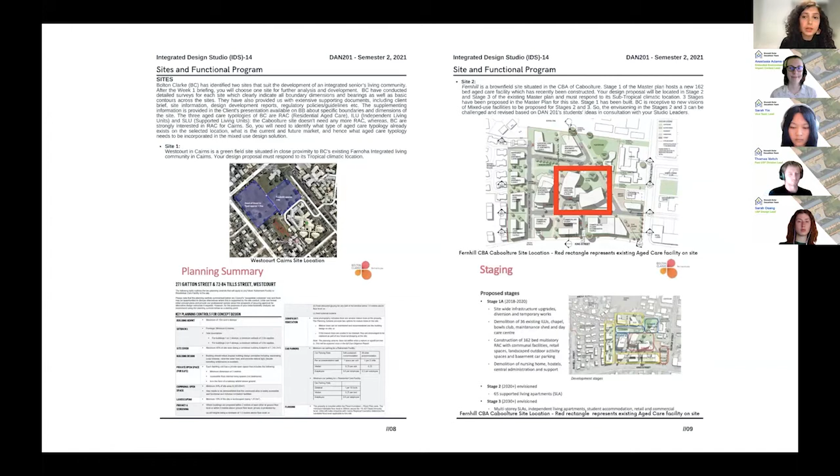The 13-week-long semester process that we are finally coming to a conclusion at, we are in week 13 now, was actually broken down into 3 types of workshops that deviated away from the signature studio model. We designed these to conduct with all the IDS participants in a sequential manner to facilitate design outcomes and data collection. The students had 2 interlinked assignments: the first half of the semester's collaboration focused on rapport building, learning and sharing interdisciplinary vocabulary of practices, design brief development, site analysis, exploring constraints, and developing master plans. The second half focused on detailed design development, testing of ideas, and evaluation of design approaches.

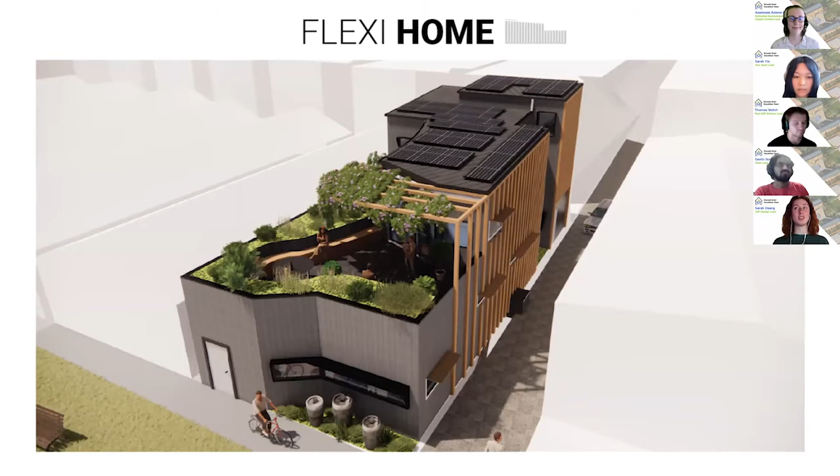A key feature of the Flexi Home is that it can function as 2 separate residences or as a single residence, depending on what the occupants need. This makes the home suitable for occupants at almost all stages of their life - if you have a young family that needs the entire space, or if you've got an elderly couple who maybe require less space but could benefit from the second residence having a carer living there instead. It also uses disability-friendly design and occupies a minimal plot size, responding to issues like urban sprawl and accessible living. And of course, we designed the Flexi Home to be as energy efficient as possible to lower its environmental impact as well.

So I'm just going to go over some of the basic layouts and design of the building. If we go to the next slide, you can see when it functions as 2 separate residences.

You have the primary residence on the bottom floor, shown in orange on your left, and this is the level which is wheelchair accessible. Then you have the secondary residence on the 1st and 2nd floors, shown in blue.

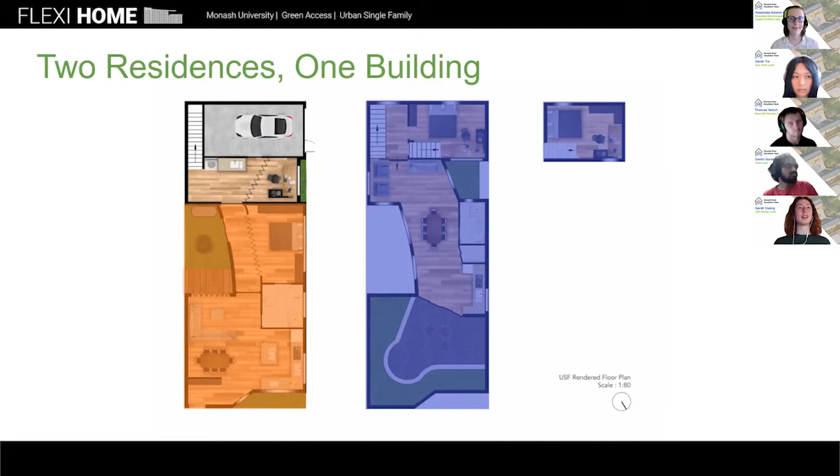When it's functioning as two separate residences, it was designed so both have their own entrances, their own green spaces, outdoor spaces, and their own utilities.

They did share a common laundry area, and this also functions as interior access between the two residences, which allows the whole building to function as one residence if a single family is living in it.

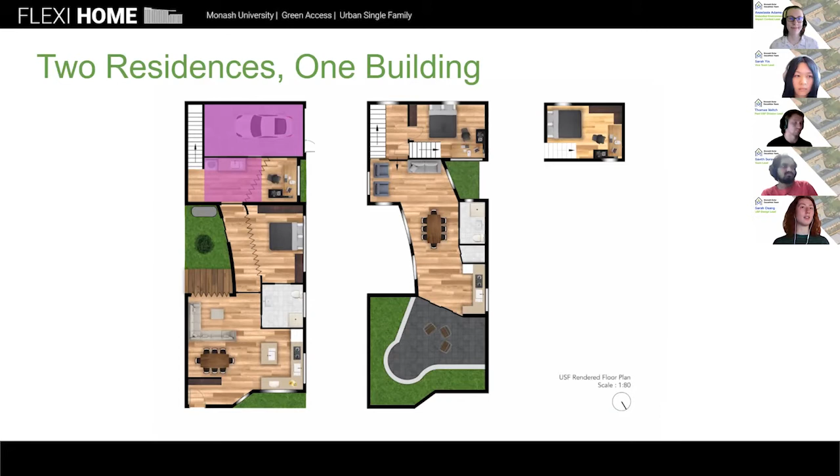When designing it, we wanted to create a really high quality living space, tried to make it feel light, open, and give it a strong connection to nature. This incorporated high ceilings, open plan living, and lots of windows throughout to ensure natural light and ventilation, plus plenty of green spaces and indoor-outdoor living areas.

So now I'll pass to Tom, who's going to go over some of the more technical details about design. Thank you, Sarah.

I'll go over the HVAC system first. Basically what we did is separate the ventilation and the heating and cooling systems into two separate ducting systems.

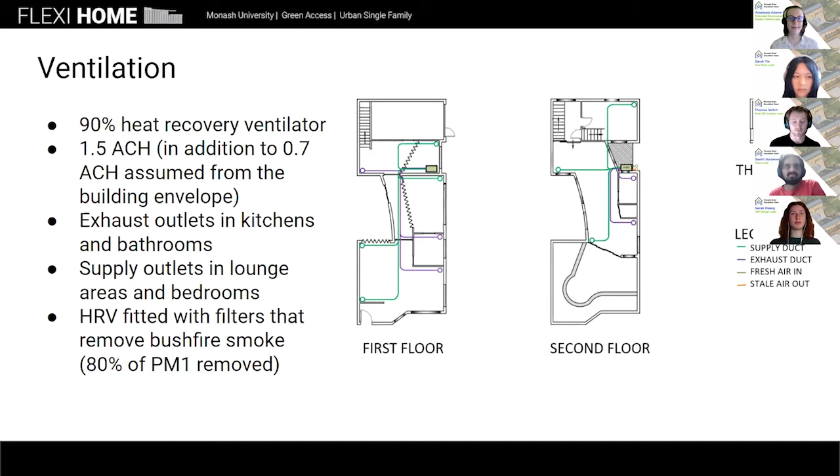We also have exhaust outlets in the kitchen and bathrooms, supplying air into the main areas such as the lounge room and bedrooms. The HRV is also fitted with a filter that removes up to 80% of smoke particles, which is necessary for Melbourne.

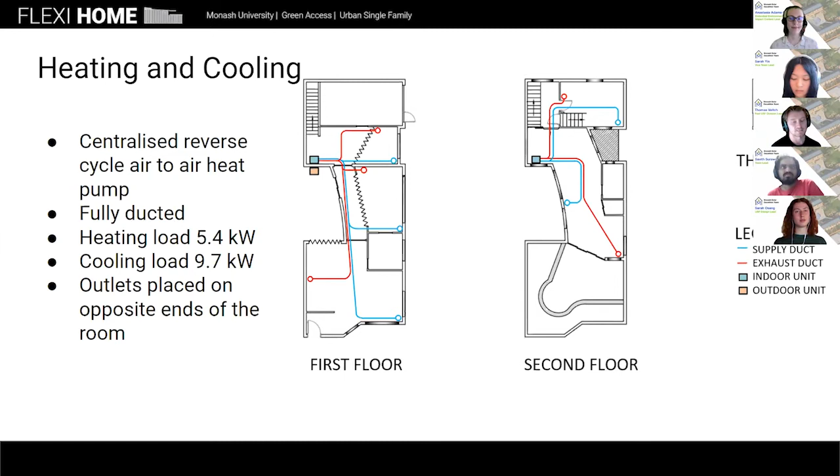For the heating and cooling, we designed it to be a 10 kilowatt system, which can handle the maximum cooling load of 9.7 kilowatts, and it's a centralized reverse cycle air-to-air heat pump. We also have outlets placed on opposite sides of the rooms to encourage airflow.

As I said, this project has to be net zero. So to do that, we also have double glazed windows and seasonal shading. For our solar panel system, we have 29 solar panels with a hybrid battery.

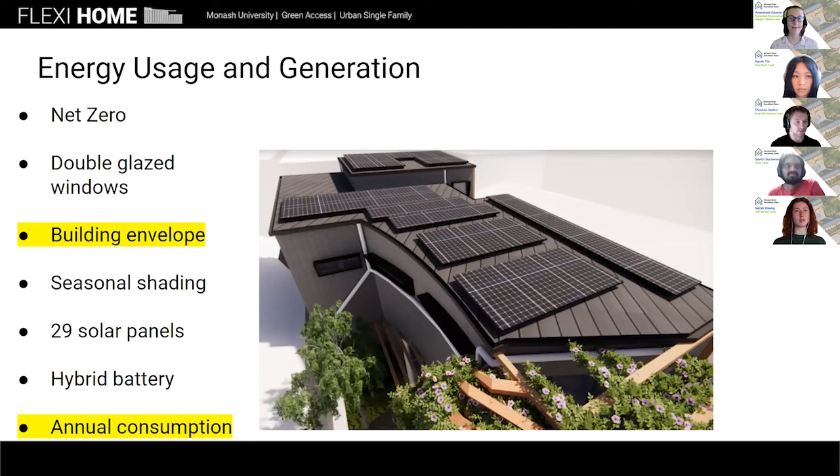One of the main features we had was a rooftop garden, so we made sure to include native plants, as these are far more drought resistant.

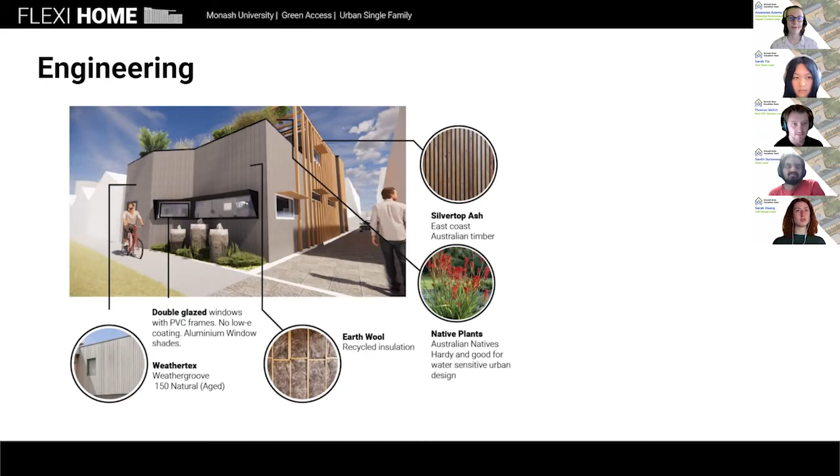We also wanted to make sure we had a high quality level of insulation, so we have earth wool batting as well as extruded insulation, just to get a higher R value. Lastly, the total cost was $425,000, which was $45,000 above a code compliant home.

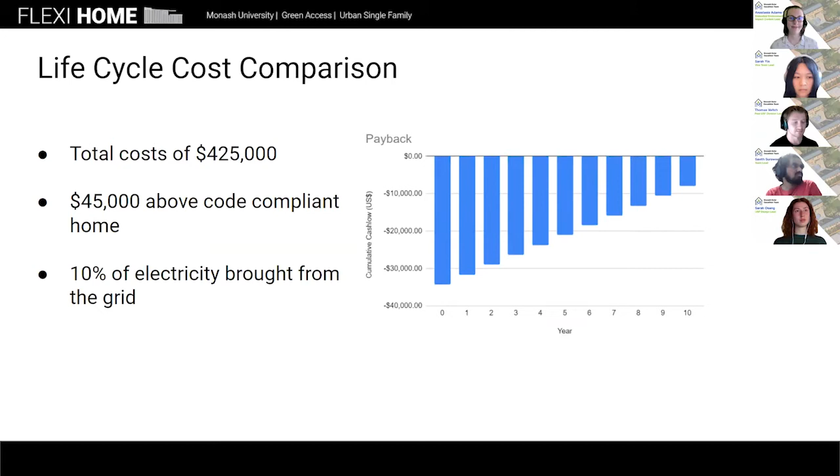Sarah and I will be around for the Q&A if you have any more questions. I'll pass it on to Sav, who will do the attached housing.

Thanks, John. So I'll be taking the attached housing division's design. We designed a domestic violence refuge for victims of domestic violence.

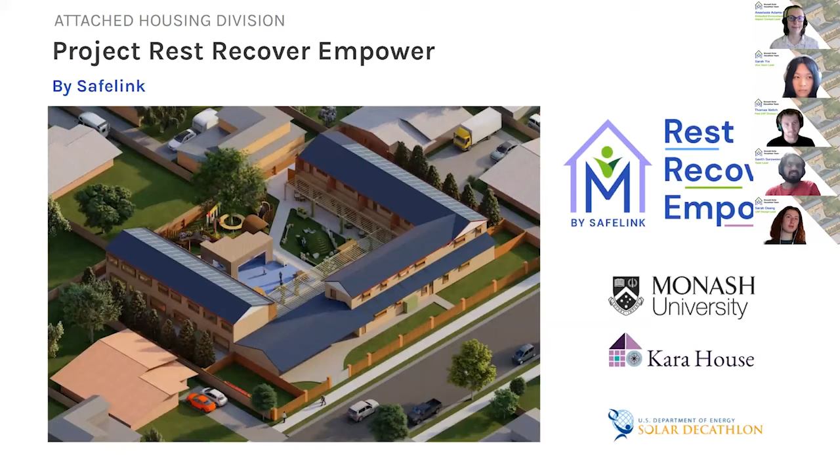We actually partner with Kara House, an organization that deals directly with women coming out of these situations, and they handle everything for them. We wanted to cater to all their needs and the things they've found missing in their previous refuges. So this is basically for transition housing.

We've got a series of goals that we used to guide it. We wanted to make sure it had purpose-built spaces. The spaces were also flexible, which is one of the requirements we got from Kara House. Security and privacy were obviously really important, along with a design that was easy to operate with low maintenance costs and had appeal to stakeholders.

To speak to the purpose-built space, we had a really simple layout. As you can see, there's block A, block 1 at the top and block 2 at the bottom, which include the standard units.

In blocks 4 and 5, we've got additional multi-purpose spaces and staff areas for the Kara House staff to monitor the situation with the women. And in the center, sensory gardens and kids areas so it's not a boring space for them, they get to enjoy it. So it's really practical, and we tried to make it colorful and a little bit different.

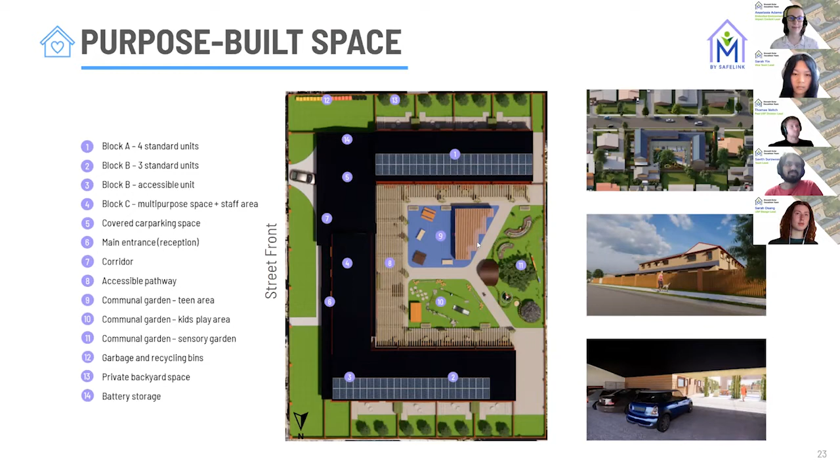That layout takes in the security and privacy aspect, with a U-shaped layout facing everything away from the road so you can't really look inside. That was really important to them when we designed it. We also have additional cameras, giving us layers of active and passive security.

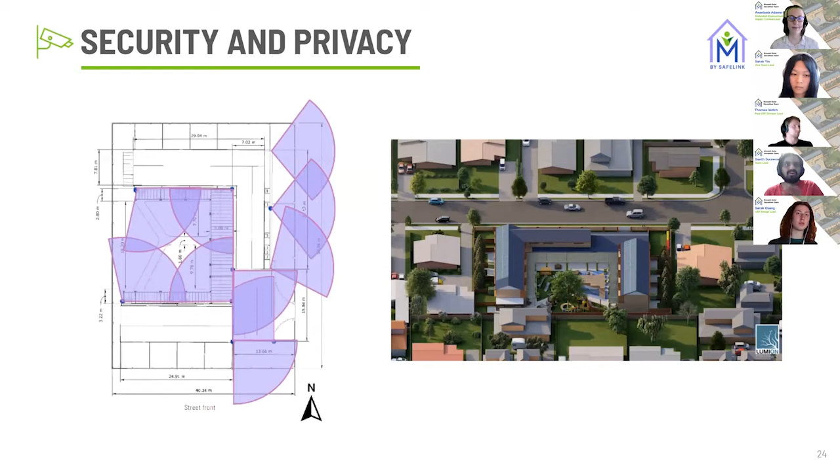We have really good thermal envelopes, high efficiency windows, and all that to make sure we're reducing the energy usage to heat up our spaces. We also took real consideration into the material choices we made for everything in these envelopes.

We also made it important in our design to have really good acoustic insulation, because for this kind of house the occupants are sensitive to the others involved, there's usually loud noises and stuff. So even though we had adjacent units, they're pretty good at isolating noise.

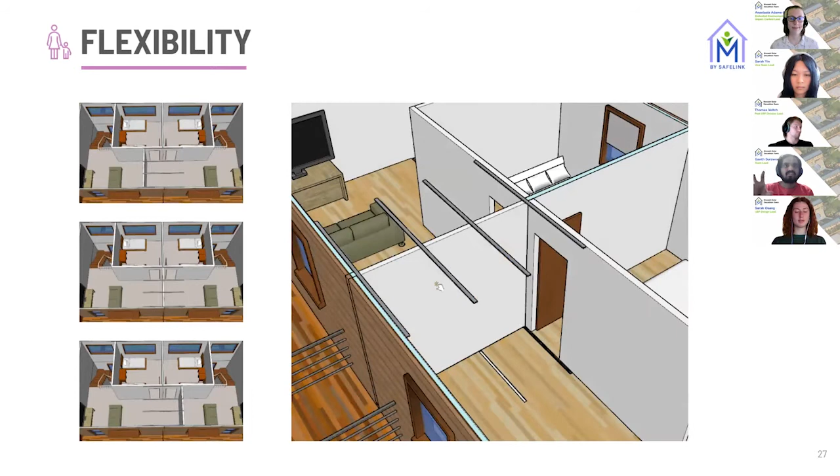One of our highlight features was that flexible layout. On the top floor, we have a movable wall, and it allows the design to have a different number of bedrooms when required.

You get a better view of how the adjacent units can change and adapt, having an extra number of bedrooms to accommodate a larger family if needed, while a single woman can take up the other one, or they can be put into the standard size. We got feedback from Kara House that they'd often not be able to use some spaces because women taking up the whole space meant they didn't have enough beds for bigger families, so this was really a highlight feature for them.

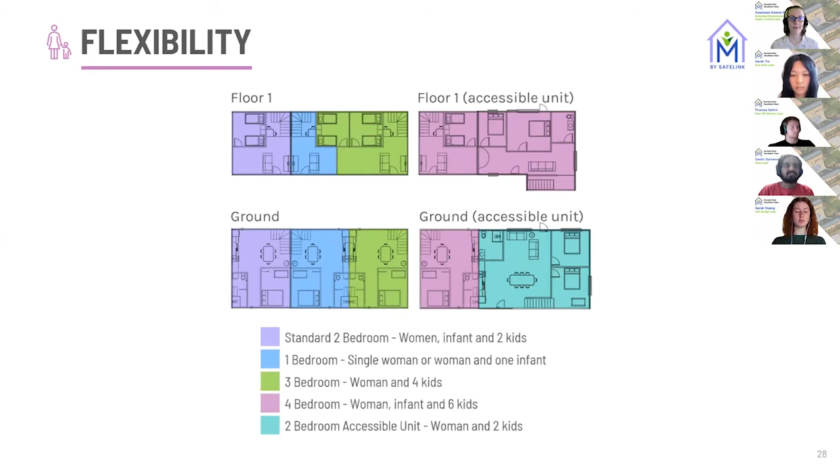Our ventilation system was basically made up of a fan coil unit that did the bulk of the heating and cooling, and a heat recovery ventilator to handle improving efficiencies, reducing wastage, and changing air.

Because of the work we did with the ventilation systems and a really good envelope, we got really low energy usage compared to a standard refuge we'd have to build. The energy savings are massive, and compared to a standard home it's amazing energy performance, meaning we made something practical and energy efficient for Kara House.

So that's all, I'll pass it on to Sarah and Anastasia for the school.

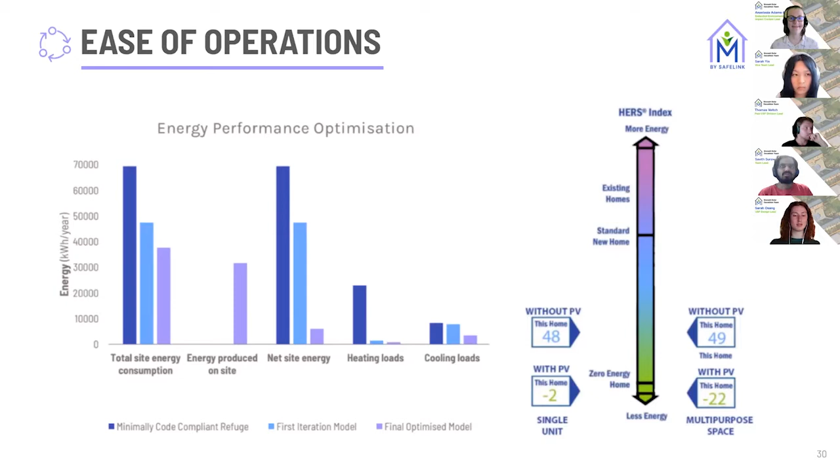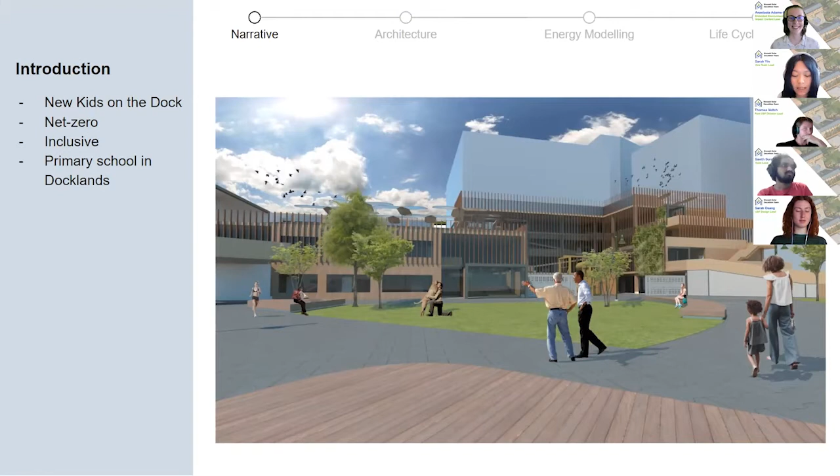Our team, the New Kids on the Dock, designed a net zero inclusive primary school based in Docklands. We chose Docklands because it's part of the Urban Renewal project, funded by the government in an effort to revitalise the community. Moreover, there's an urgent need to build more primary schools in the city area.

Our school has been designed with four design goals in mind: minimizing the environmental footprint of our building by proposing an energy efficient design and maximizing the circularity of the building overall. We also wanted to accommodate students with special needs, including vision, hearing, or mobility impairment, by incorporating various inclusive design elements throughout our school. We also implemented features that aim to nurture sustainable habits in our students that they hopefully take with them into the future. Lastly, we wanted to engage with the wider community by integrating the school into the local context and transforming it into public spaces outside of school hours.

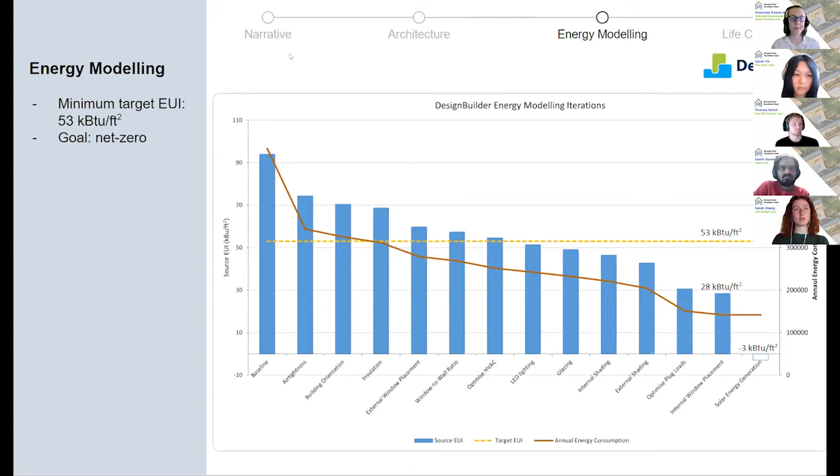Thank you, Sarah. A key goal of our project was to reach net zero energy, where our building produced as much energy as it consumed. We first aimed at achieving this by reducing our energy usage as much as possible through passive energy strategies, such as thermal chimneys.

The thermal chimneys draw on the vertical nature of our school to increase natural ventilation throughout the building. They use a combination of air movement from the wind and thermal siphoning to encourage stacked ventilation to move from low to high elevations and eject the warm air through the sawtooth roof vent system. We also placed vents on the ground floor of our south-facing walls to take advantage of the prominent southerly wind during the warmer months.

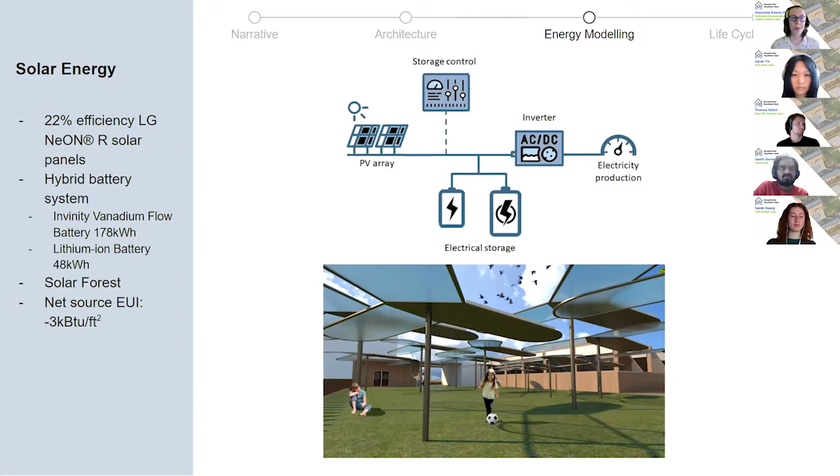We then offset the remaining energy usage with a photovoltaic system on the roof and a hybrid battery system. Reaching net zero energy helped us reduce our carbon emissions during the operational stage of the building. However, we wanted to reduce our environmental impact at all life cycle stages.

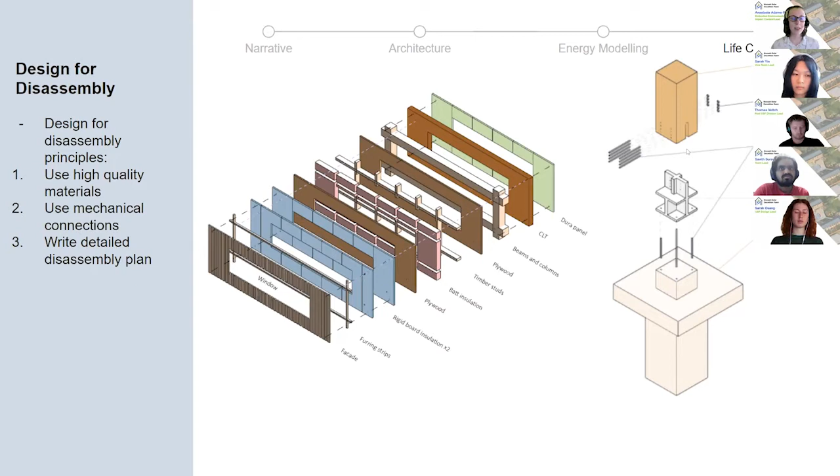One example is at the end of life stage of our building, we incorporated design for disassembly principles. We used high quality materials to ensure everything was lasting as long as possible. We used mechanical connections like bolts and screws, and then we wrote a detailed disassembly plan, as you can see in these diagrams.

Overall, this meant that at the end of our building's useful life, we could disassemble it rather than demolish it to ensure all of the building materials could then be used on future projects. Overall, this helped us achieve a building circularity score of 87%, which considered both our input materials and then how we use these materials at the end of the building's life.

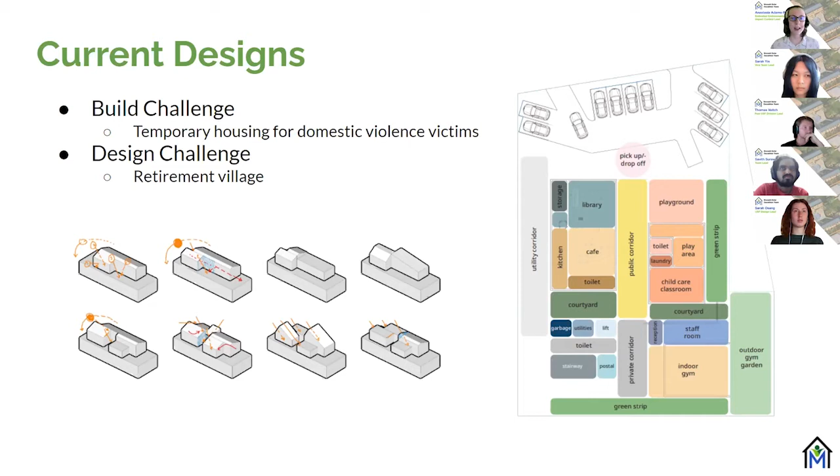Overall, you've seen all three of the divisions we competed in last year. Going forward into the competition, we're going to compete in the Build Challenge and the Design Challenge, where we're building a transitional house for domestic violence victims and designing a retirement village.

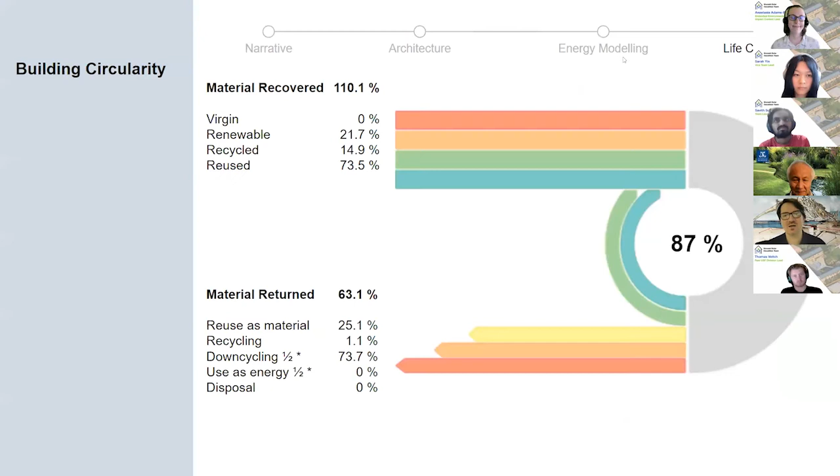Maybe one question, I can't remember which presentation it was. I think it was the second or third presentation about the mechanical systems. I'm curious how you got introduced to how they work, how from a technical perspective, how to incorporate that as a designer into your work. As an architect, I know these systems can be quite daunting for us because we don't know much about what it is that they do and how they influence our designs. So maybe putting the question to the team, at what point were you dealing with those systems, how were you including the thoughts about ventilation and sizing, for instance, and positioning of the equipment? I remember with our studios, there was a lot of conversation about where do you put your equipment, how do you service your equipment, and so forth. So what role did that play as part of your design?

Yeah, I could speak to that. So we spent a lot of time, as a team, doing calculations and things like that. But we also spoke to actual companies, engineering firms, to get advice on all of our systems, like the fan coil unit and the heat recovery ventilator.

We made sure that it would be able to serve both those spaces at the same time. And we got the values and stuff from our actual suppliers, so it was definitely a joint effort.

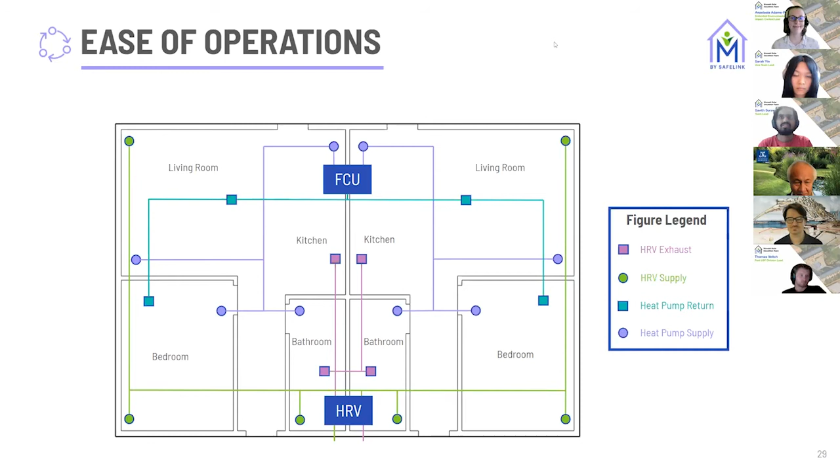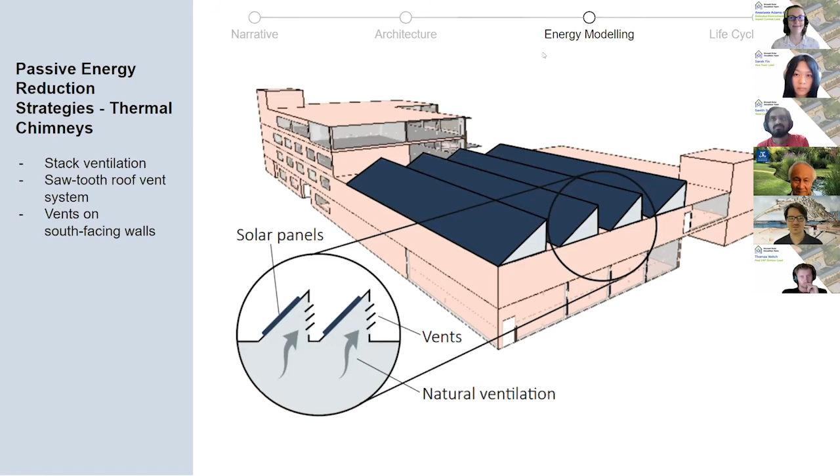Lou, I wouldn't mind sneaking in a quick question. I don't have access to Q&A as a host, but really impressive work, I agree with Dominic. I was really impressed at the breadth of different disciplines you had involved, even business people from memory. Just wondering what the format was in trying to bring everybody together - did you bring everyone together at once, or was it little parts of the team? And how enthusiastic were some of the less built environment disciplines like business in getting involved in the design?

We come at it like we recruit - looking for people that are sustainability focused at first, so it really is a group effort. It's not bringing in people randomly, everyone's really passionate about this team. It's the only way these kind of things happen, and for us, in the best way possible, we collaborate the best that way.

Did you get together in one large group? Yeah, over Zoom for most of the year, and then once we got to open up, we did come in person and do big sessions over multiple days, especially leading up to the competition - massive study sessions, and just cranking out our submissions.

Well, we got a question from the audience asking about how you optimize your building fabric and making sure there's no thermal bridging and things like that. I think one of you could answer for one design because of the time limitation - we could do this at the end too. Tom, do you want to take that?

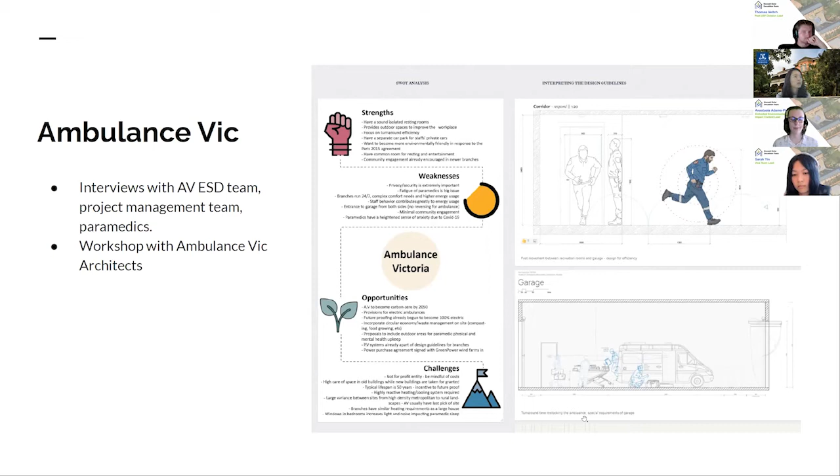This was quite an interesting moment for both architecture and engineering students, so they could look at built examples at the forefront of sustainable design and how they achieved those outcomes through built projects.

Moving on to ideation - at the beginning it was really important for us to get students to develop an understanding of net zero carbon design, as well as ESD first principles.

A lot of the students within the studio were a mix of first year and second year Master of Architecture students, and Master of Engineering students. So the varying degrees of skills and knowledge had to be bridged at the beginning of the studio.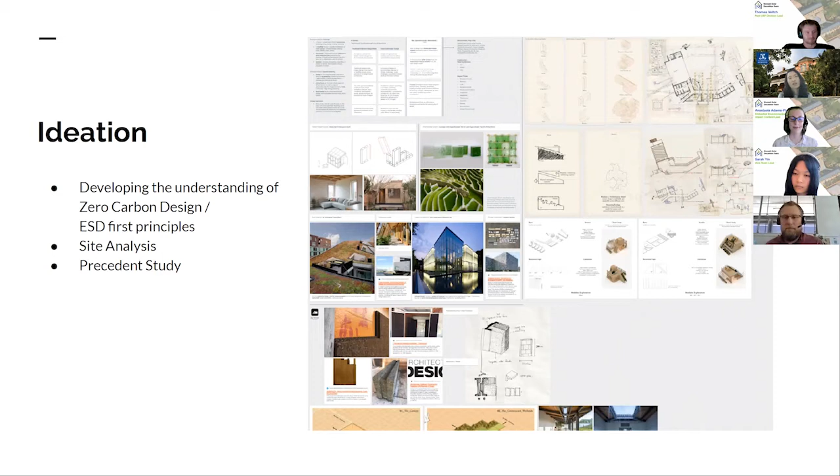Something I'd like to note here is that these works were all done in groups to ensure interaction within the student body, making sure an engineering student was always integrated within those groups - each group was allocated one engineering student, so that engineering students weren't isolated in a separate group.

Moving on to idea sharing - we explored both small group idea sharing and bigger group presentation-style idea sharing. We all know the usual studio pinup setup, but in the digital studio format it was important for students to have an environment to share ideas in a small group setting, communicating in a rather casual and informal manner.

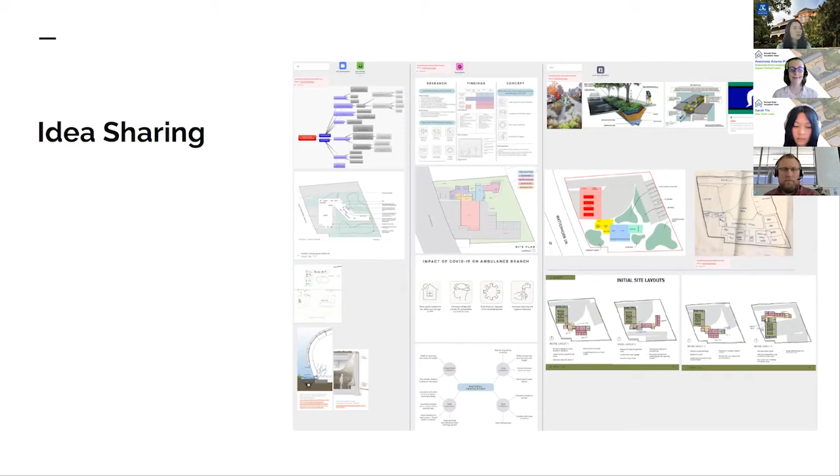Whereas we found that in a larger group presentation setting, the students can get quite rigid and formal in terms of presenting their ideas, so it needed to sort of tag in between to balance out those.

If we briefly go into the design development process, one thing we incorporated was revisiting some of the interview content from the beginning of the studio with the paramedics and the construction and development team from Ambulance Victoria, to understand the human scale needs and requirements of each activity, and the key spaces that needed to be understood in a very detailed manner.

So these are some of the series of drawings that the students collated as part of the design development exercise. And this is just a quick snapshot of how we usually worked around the weekly pin-up exercise, to ensure everyone had something to talk about every studio, and that you could see everyone else's work in a quite open platform.

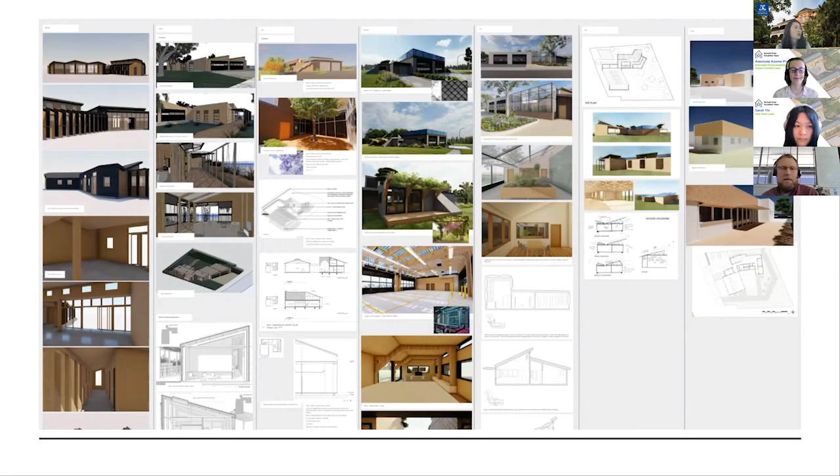So I'll be going through 3 key works from the studio, ranging from second year first semester, and then first year first semester as well, so you'll be able to see quite a range of skills and design resolution.

To start with, I'll start with Vincent's work. The site plan shows quite a few key parameters around the spatial requirements of Ambulance Victoria - the garage space, living and dining spaces, resting areas, and large garden spaces were all part of the key requirements that needed to be developed according to each student's design objectives. Vincent looked at a number of different ways in which Ambulance Victoria could take on future initiatives.

These range from some of the more experimental design initiatives all the way down to quite a small scale achievable design initiative. We can look at some of the more experimental things like the PV garage and integrated charging stations for the vehicles, and the integrated landscape and wetlands system into their garden spaces, and community spaces that really start to bring the community into the Ambulance Victoria site, opening up this branch as a community hub.

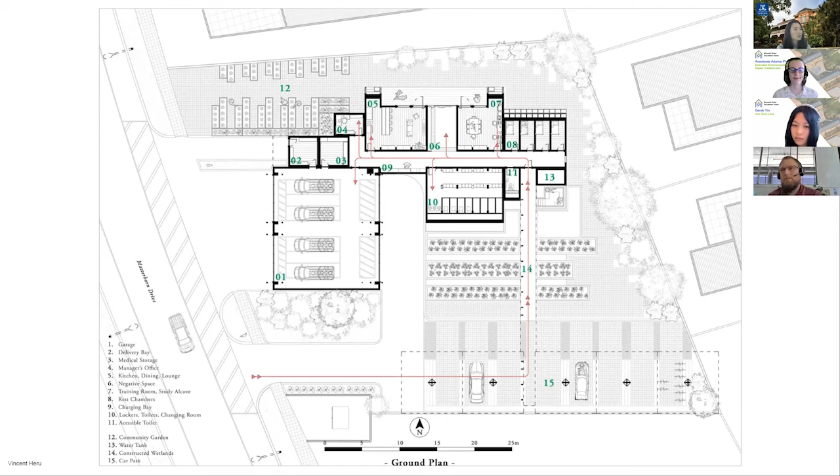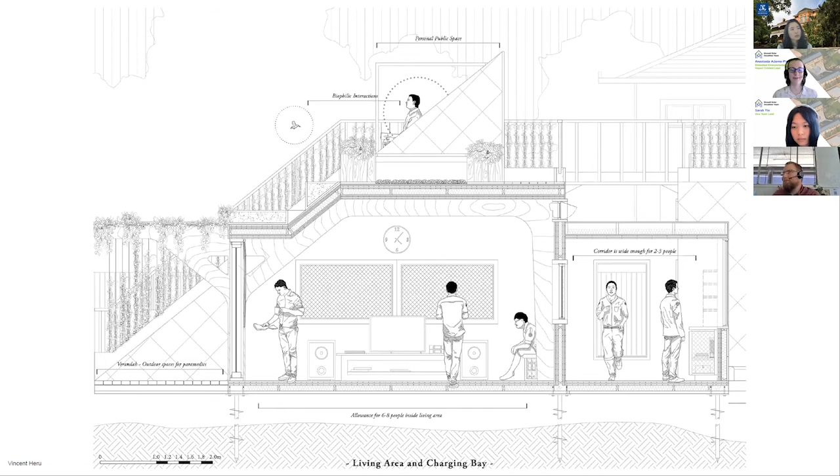And some of the other smaller scale designs you can see in the following drawings - this one really looks at the constructed wetlands within the back garden spaces. If we go into the sections, you can see how they've developed from the previous ergonomic studies, and then they start fitting their spaces into the various key areas that have developed from both ergonomic studies and the design requirements for Ambulance Victoria.

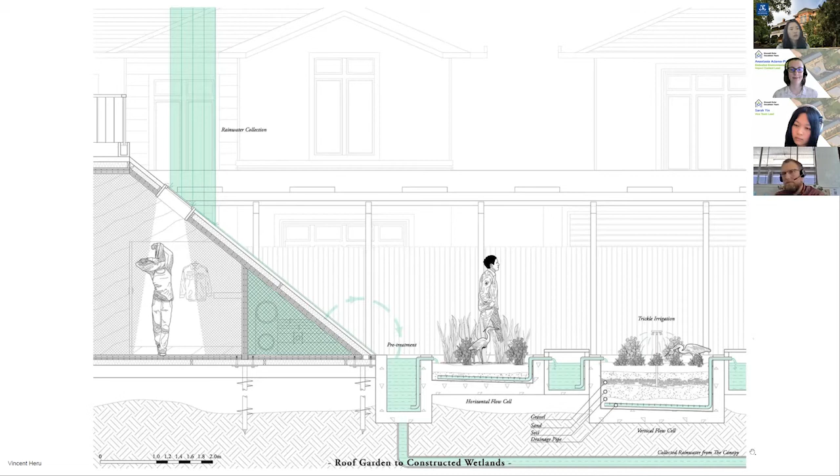With these representations or renders, the studio really focused on communicating those ideas quite clearly to both the stakeholders, noting that some of these imageries in real life practice can be used in public communications. So we focused a lot on finessing these images to make sure they were truly reflective of the users and who it would be communicated to.

I'll flick through some of these images quite briefly. This is something David will touch on a little later, but each student did go into a little more technical detail in terms of how the design would achieve passive house design principles and calculations of carbon emissions.

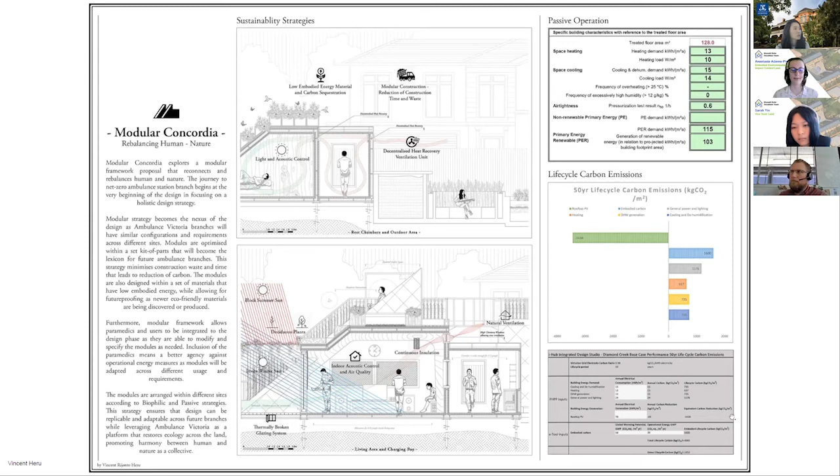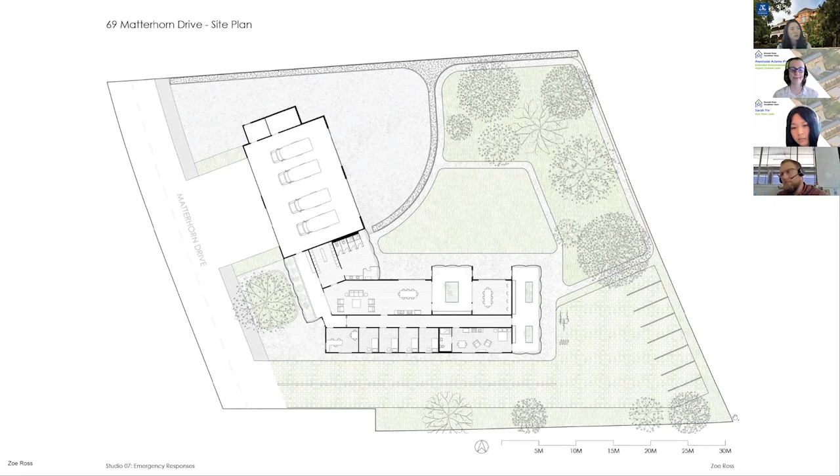The second student is Zoe, and one thing I'll probably talk about in Zoe's work is mainly the material research. Zoe was a relatively inexperienced student in terms of environmentally sustainable design principles, but one thing she really wanted to explore was new materiality that could be integrated as part of the design solutions. The material she looked at was ETFE, and how that could be adapted into various different functions of the Ambulance Victoria branch.

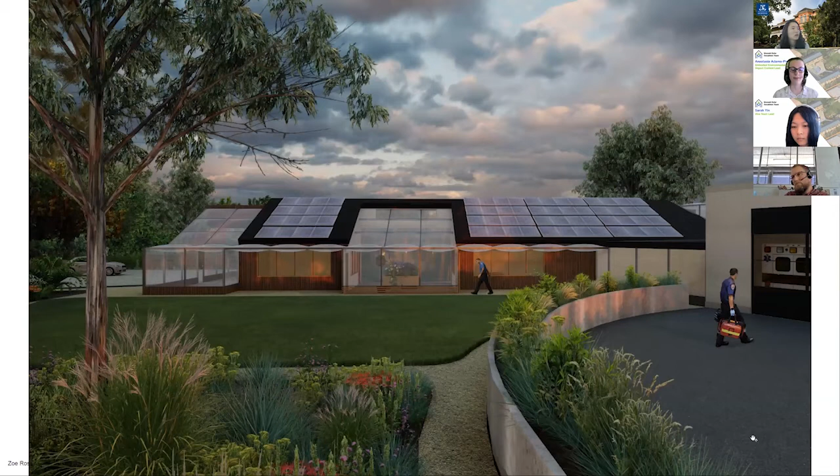These are some of the images showing where she had integrated ETFE and various other ESD initiatives that she proposed for this branch. A lot of these sections are really just touching on, again, those first principles in terms of ventilation and orientation for the branch design.

Looking at some of the detailed sections in terms of students understanding how those technologies actually integrate into the building, but also be able to communicate this back to the stakeholders. So we explored a lot of different methodology and different ways in which the drawings could communicate both the technology in a simple manner, but be able to be quite didactic, so the stakeholders or non-designers could really understand what we were proposing.

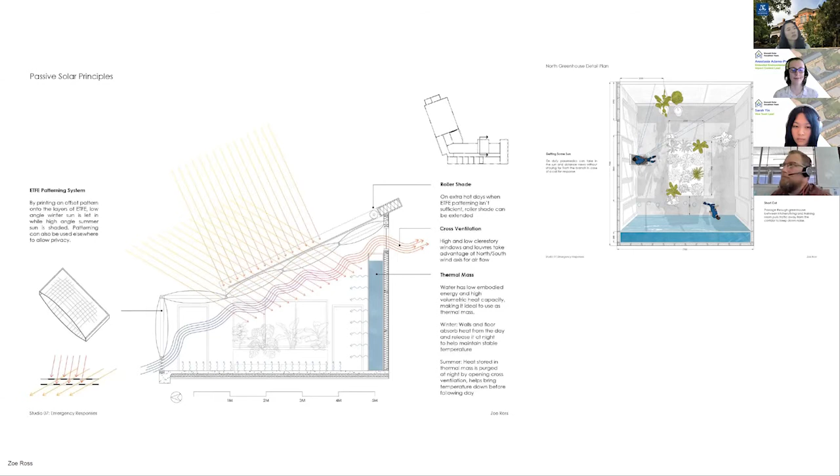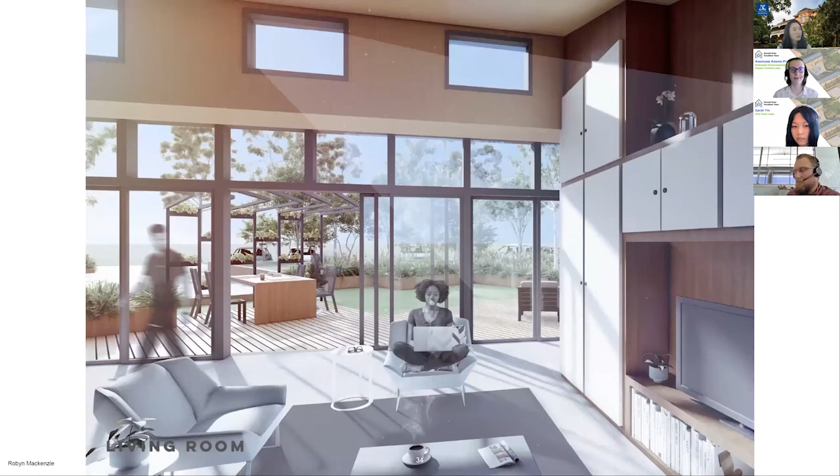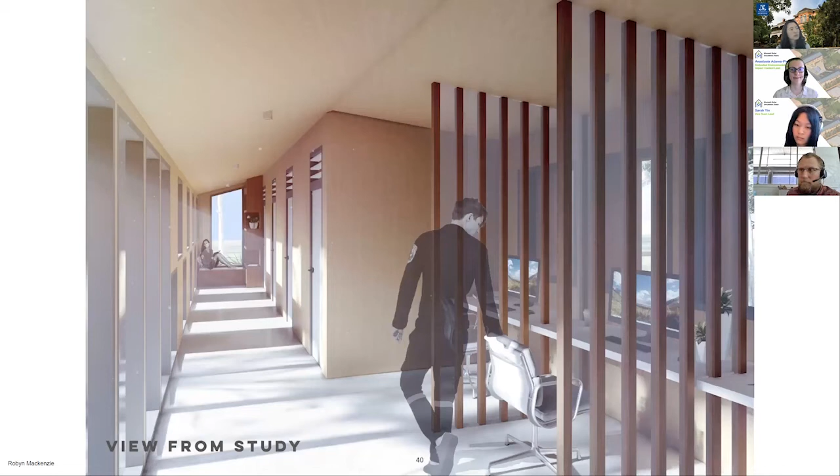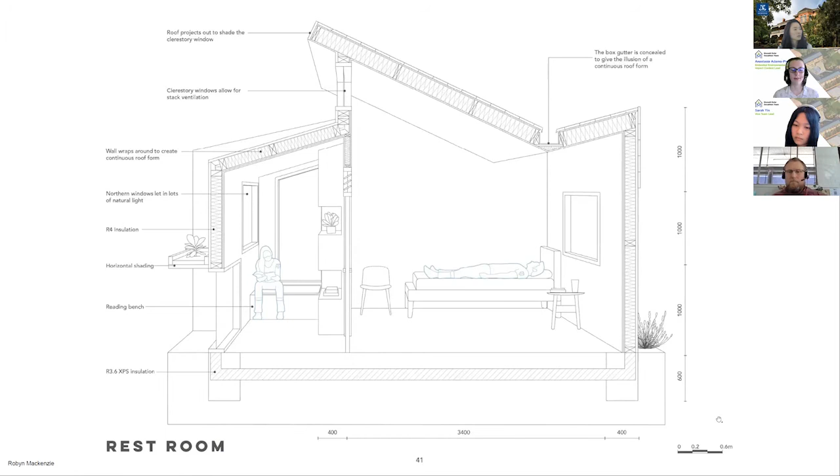The last student's work is Robyn's, and again this one I wanted to touch on was the integration of the landscape work and some of the programmatic suggestions Robyn had done for this proposal. So apart from the usual gamut of spaces like living spaces and dining area, she also looked at various study spaces and rest space for the paramedics that could be integrated within the branch spaces, and also some of the other really small design details that could be integrated as part of further development for the branch design. So here's some of the views she was looking at as part of the landscape integration.

So all of these were fairly well received from Ambulance Victoria, in terms of where the typical ambulance branch doesn't really look at a landscape solution as something they need to improve upon. But a lot of the proposals that students looked at focused on those small opportunities that could be improved with Ambulance Victoria.

To summarise some of the observations I had: really creating an environment for open discussion so the students felt safe and unjudged for any of the comments they could make, and then providing opportunities for a variety of interaction, as mentioned, in a small group setting, a bigger group setting, and a really open forum with the stakeholders and consultants.

And then including engineers from the onset of projects. I think this was echoed many times with other speakers as well.

And this next one is something I really want to point in on for everyone: providing support and toolkits for the engineers and non-designers to participate in ideation and design development. I think we often forget that non-designers, or anyone who doesn't necessarily have experience in this design development or ideation process, we need to provide those processes and toolkits for them to be part of the discussion. And this was something IDS really looked at in detail.

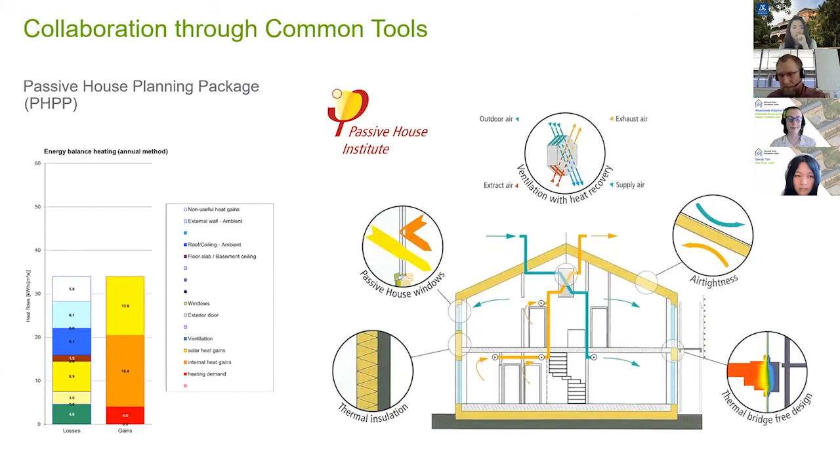We also, alongside that, put forward the use of eTool, which is a life cycle analysis software. Again, it's a relatively easy tool for students to use. It's hard to use it when you don't have a lot of detail on your project, but nevertheless, it's not too complex. It's kind of like a glorified spreadsheet, really, for putting data in about the volumes of your materials and the environmental impacts data for those materials.

So we were able to follow that through such that students could get a picture of the whole life cycle of the building, both in terms of its embodied carbon and its operational carbon, and to try and offset that with the potential for renewable energy generation on site. So looking at this kind of energy balance, or effectively a sort of net zero potential for their project.

And so that was one of the key questions: can you do it? And so we asked them to work through this process together and come up with the answer.

When we did the vetting, which is part of the IDS process, so after the students' works have been completed and handed in, we look at how did they perform, and all of the students were able to complete the PHPP modeling process. Some of the students carried out the eTool modeling process, and most of the students were able to demonstrate convincingly that there was a net zero carbon potential for their project.

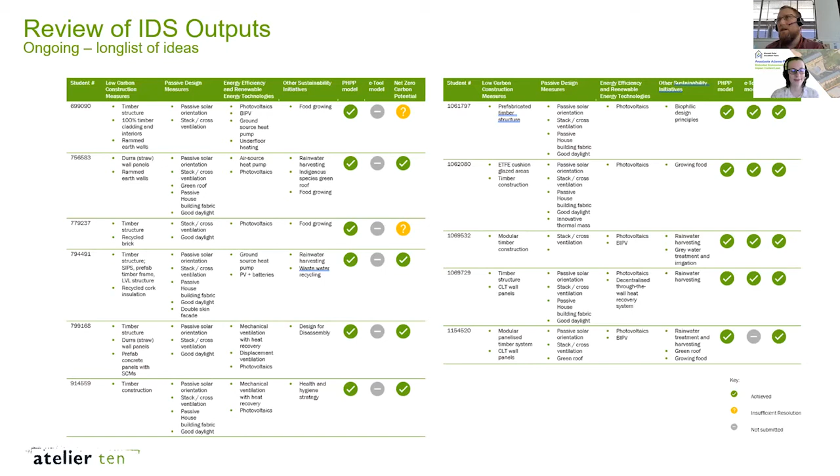In addition, they identified a number of low carbon construction measures, passive design measures, energy efficiency and renewable energy technology measures, and then some other more interesting sustainability initiatives for their project.

We asked them to specifically produce a set of information at the end of the exercise, which was to explain their scheme either with an isometric or a section. It's very important that the students are focused on how their sustainability initiatives integrate into the architectural form.

We also asked them to report on their passive operation potential through PHPP modeling, and also to report the overall sort of net zero carbon potential for a 50-year life cycle, and to give a narrative alongside that.

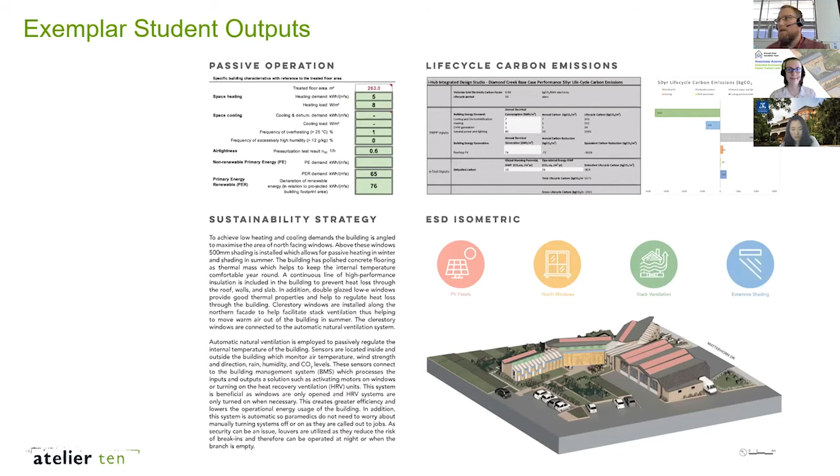So every student produced one of these A3s as part of their submission. And as you can see, some great graphics and ways of explaining the concepts for their projects.

Our role extended beyond the studio, so we actually vetted the work afterwards. We went through all the projects, really looking at where they'd focused their attention in terms of delivering potential for net zero carbon. This was a report that went out to the team, goes out to the client, Ambulance Victoria. So really, looking at where they'd focused, it was really on this net zero carbon pathway, but solutions which also brought health, well-being, and operational savings to their projects.

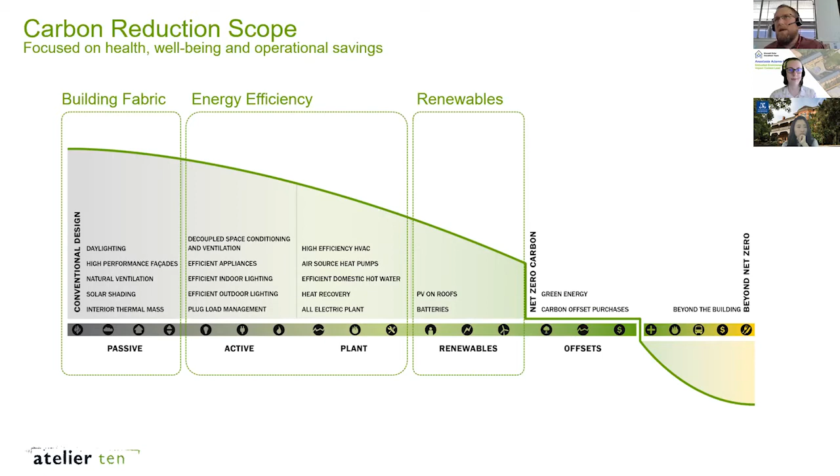Some of the passive measures, it was interesting, because generally the typical building for Ambulance Victoria is not too bad in terms of passive design potential. It's, like I said, rather like a large domestic property with good natural ventilation, generally high thermal mass, generally good form factor.

But what they brought to that was looking in detail at some of the wall build-ups, particularly the difference between walls that contain steel studs or timber studs, and how dramatically different they perform because of the thermal bridging effects. Looking at using the PHPP to help with their passive design potential, so form, orientation, shading, and also looking at the importance of airtightness, so looking at different airtightness targets and how that translates into the way they think about their detailing.

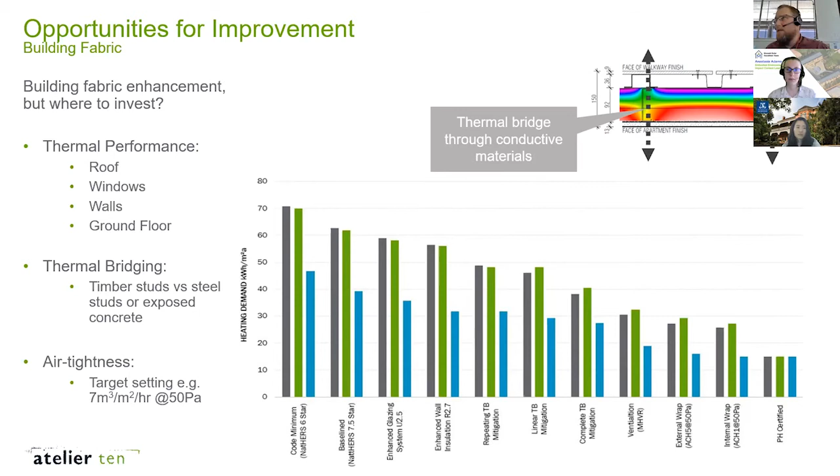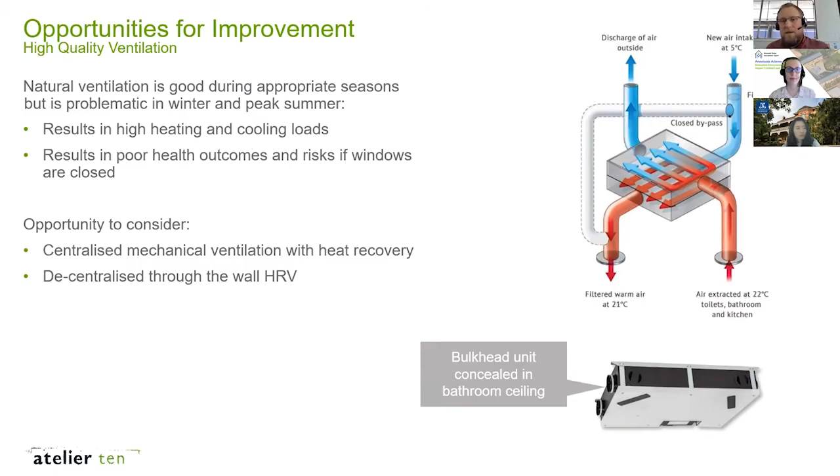Natural ventilation is obviously really important for the bulk of the year, but it was interesting thinking about what happens in winter. Most students incorporated heat recovery ventilation, as we saw in the earlier schemes from the Monash students, looking at options for centralized mechanical ventilation with heat recovery units, or decentralized through-the-wall HRV units. In terms of active systems, there was a tendency to decouple the fresh air supply from the HVAC systems for heating and cooling, focusing on delivering an all-year-round resilient, potentially filtered source of fresh air.

A lot of ambulance stations are located in acoustically challenging situations, close to big roads. So it's important to think about how you can get good fresh air through a mechanical system like this, while still allowing the opportunity for natural ventilation.

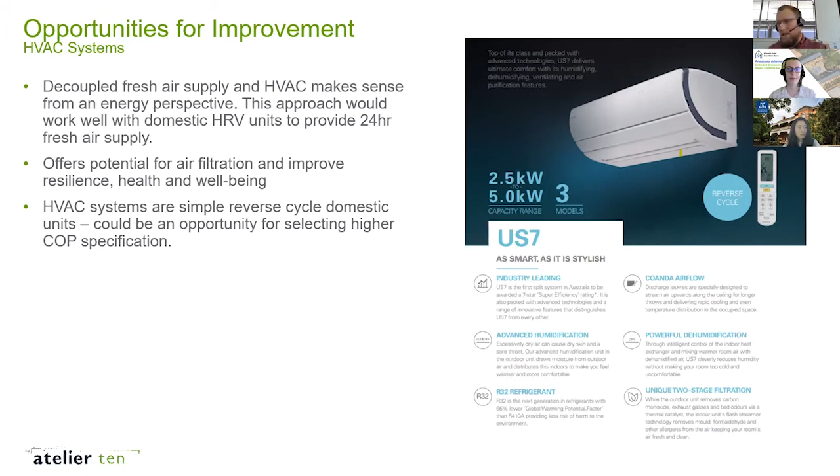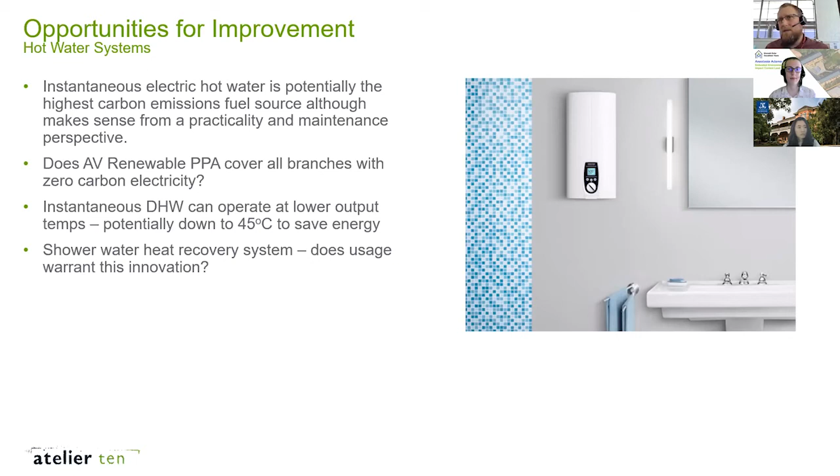Hot water systems were an interesting one. Some students looked at integrating systems with solar water heating potential and electric heat pumps, and some looked at instantaneous domestic hot water, because the usage of water turns out to be very light at ambulance stations. That's a way of minimizing standing losses and saving space, so there were different approaches, which was quite interesting.

In terms of renewable energy systems, solar panels were really a no-brainer, obviously generating renewable energy but also helping with resilience. There was also a question around batteries, not necessarily cost effective right now, but could be part of a resilient system offering some backup to essential systems.

The other opportunities students looked at were embodied carbon choices. Most students tended towards timber construction, using innovative mass timber type constructions or prefabricated, modular solutions, with lots of efficiency in terms of delivery and construction times.

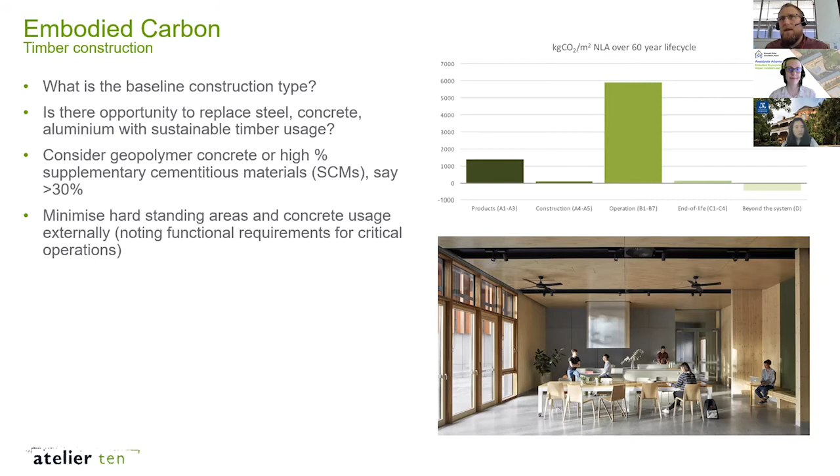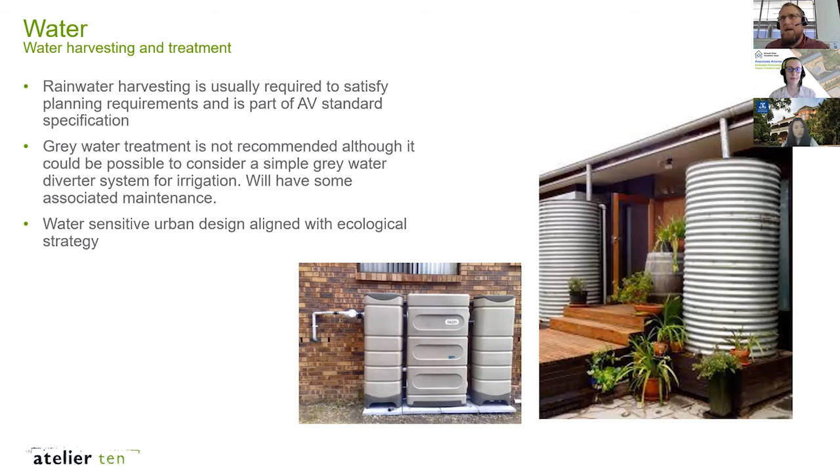Water harvesting was also explored—some students looked at water treatment, but water sensitive urban design was a very important part of most strategies, aligning with their thinking about landscape and ecology, and creating spaces where health workers and emergency response workers could get out and have some respite in biophilic spaces.

So the project outcomes were great because of the rigor we'd employed to set up a framework where students could use a tool to analyze the building's performance. There were clear results about how they could move from the typical ambulance station baseline towards a net zero carbon potential.

A number of technology measures were identified and prioritized. This was really useful to Ambulance Victoria, who've been able to integrate some of this research into their standard specification. They now have an appendix in their specification that puts forward a list of measures to be incorporated into ambulance stations and prioritizes them. It's a great piece of work, with outcomes from the studio that have fed into improvements in Ambulance Victoria's typical practice.

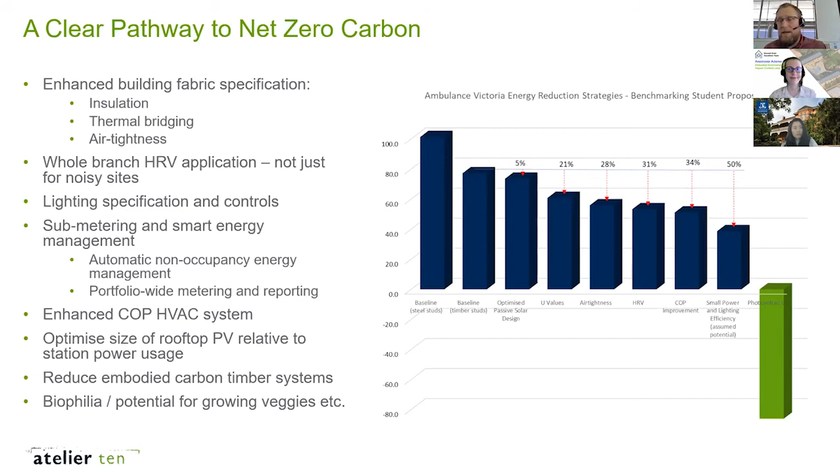Thank you very much. Thank you, David.

I would like to move on to the next section. Our next presenter will share our experience and findings from those ideas. I will start with Brendan.

Yes, thanks, Lou. I'll just share my screen. Actually, Claudio Torres, one of our IDEA students and now doing some master's research on integrated design studios, is going to talk first.

Just getting the presentation up and running. Can you see that full screen? Yes, thank you.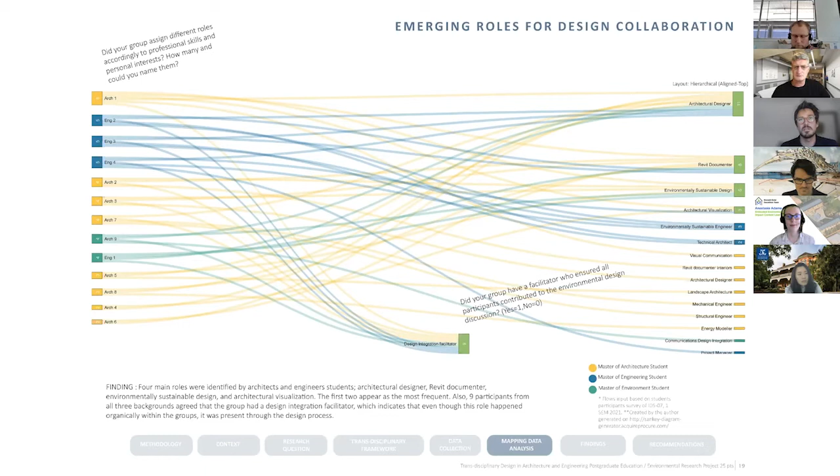This was part of one of the questions I asked the students of the IDS Aged Care at Melbourne University, and it's interesting how they start recognizing some emerging roles for design collaboration. One of the main findings is that they naturally recognize the need for a design integration facilitator, because there are always divisions between technical aspects and design aspects, with a gap in between. This role can be led by an architect or an engineer, and might address technical aspects or measure them against criteria or targets the group has set up before.

I asked the students directly what they could say about areas for improvement in terms of this collaboration. I was very surprised by the QUT presentation before, because most of them were addressing that version, and I think that's great because it gives us good insight into what could be applicable in future studios. Mainly, students value the design one-on-one review, and they also need clarification in the definition of the design process, given the complexity of the integration. Another point was setting up design exchange sessions, in collaboration with their groups and amongst the consultants as well, because the whole purpose is getting out of that silo. Sometimes there's a sub-silo, which is their own group, so they don't know what other students are doing, and I think there's an opportunity for knowledge sharing amongst students.

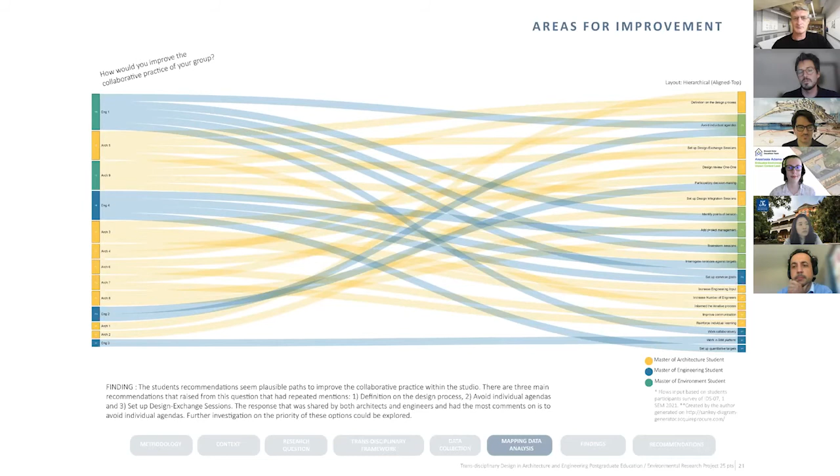Okay, thanks very much, Claudia.

I'll take you through some of the findings starting to emerge from the IDS as an overall activity, and this will be a joint effort. We'll present the findings from University of Melbourne, and then we'll get QUT and University of Wollongong as well. As Tony said at the start of the session, we're only about two-thirds of the way through, so all of this is in progress—thoughts that are coalescing and hopefully will make their way into the output documentation from the IDSs.

So the research on the IDSs happens at two levels. The first is on how we get integrated design to happen, and then the bonus is actually around zero carbon research, because we use that as a case study.

In terms of integrated design, we're preparing this document, Catalyst for Integrated Design, which looks at the process and has refined it through every successive studio to hopefully make it more informed. One of the big parts of that is project planning and procurement. I'm not going to go through all of these, but there are some really big moves you can make at the start of a project that are important to set it up correctly in the first place.

Personally, one of my big items is the way that we procure design consultants—that's fees, and it's also their motivation. I'm a big fan of alliance contracting. I think we need to do more of it in buildings, or at least some sort of performance-based fees that look at outcomes rather than just encouraging people to do business as usual, because like Claudia just mentioned, we need to be beyond business as usual. The other big one is to write it into the brief as an intended, specific thing—we need to set out to do integrated design at the start, and make sure it appears in everybody's brief along the way. Then there's really the setting up of the design environment once everyone's on board.

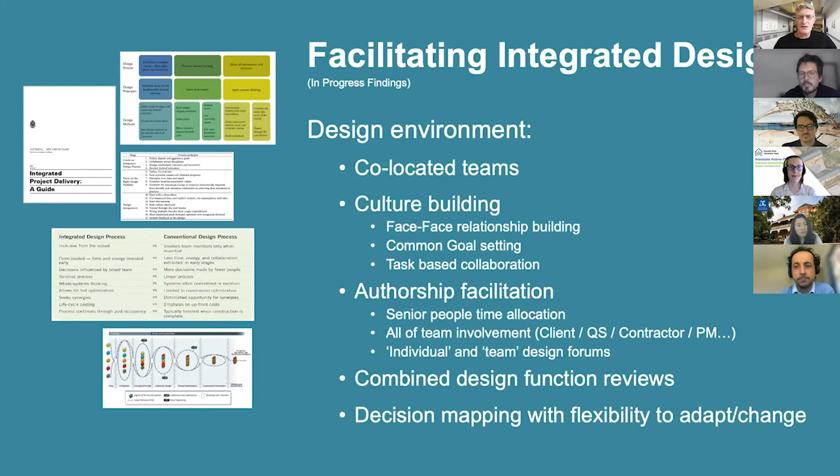I'm not expecting you to read this slide. This is really just a dump of the final paragraph in some of those reports, giving you an indication as to how those outcomes look. So in the case of schools, ambulance stations and aged care, zero carbon we found to be absolutely possible. There should be no excuse not to be aiming for zero carbon design around those facilities, both through looking at ways you can improve the efficiency and then generation and other things.

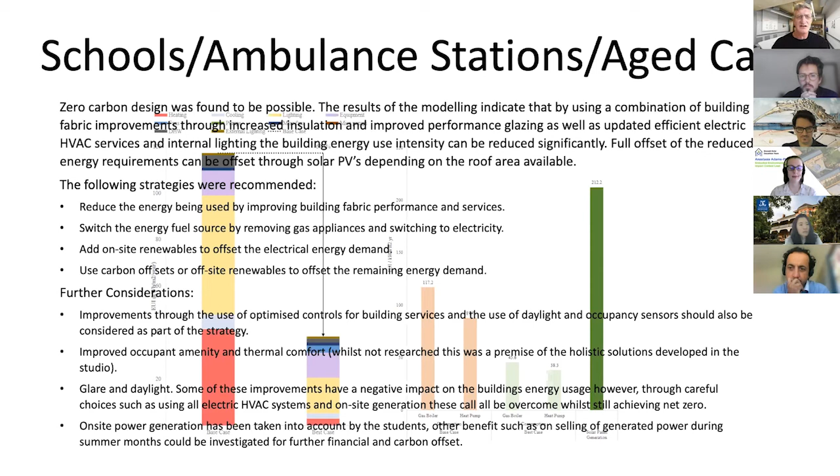Data centres was a bit harder, huge amounts of energy involved. The actual running of the data centre in terms of the building is only 1 to 2.5% of the overall energy, so it's more difficult to be zero carbon, but you can do some clever things around adjacent usages with things like community assets, swimming pools or greenhouses. So interesting stuff you can actually do around that.

And then aquatic centres was a bit of a mixed bag. They're very complex projects, the students found them a very steep learning curve. It's hard to come to definitive conclusions, but WSP, the consultants on this, went through that list of moves, all the different facets of the building, and ended up putting together a table of current baseline practice and future best practice. So there's some really good guidance in that document as to how we can get very close towards zero carbon as a building.

So look, I would encourage you to have a look at the AIRAH website. All of the reports are able to be downloaded there. There's research reports, and also the feasibility vetting reports that the consultants do on each building typology. We will be combining it all together in some sort of carbon catalogue type document at the end of the IDSs, so that will hopefully be available mid to late next year.

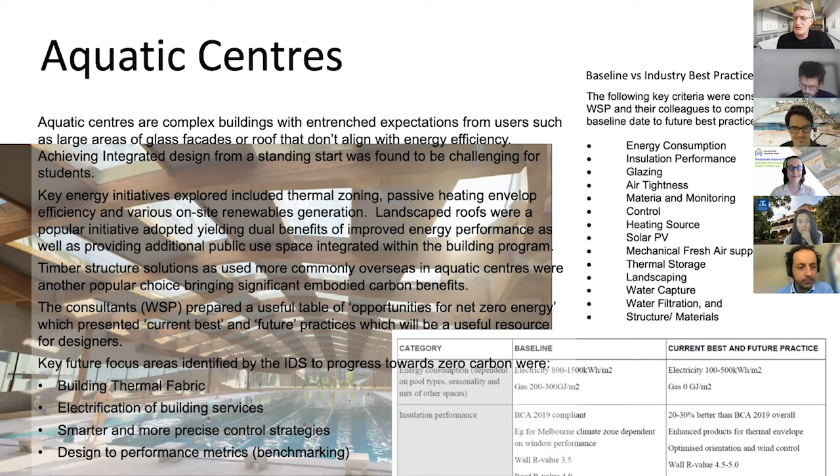So together with Brendan and Dominique and Lou from the University of Wollongong, we are assisting in the delivery of the Integrated Design Studios, and Emma and James, my colleagues, yesterday presented the details of those studios. We've got 2 studios that are almost complete, the classes have finished, but we are now getting the vetting reports back from the consultants and processing all the data from the interviews and so on. The other 2 are halfway complete, we're still running classes this week for those. So I won't cover the details of those IDSs, they were covered yesterday by Emma and James.

Today I'm just planning to give you a couple of findings or reflection points from the consultants. I would say the students loved the studios and the way the classes run. The consultants also found them very useful. You can see a quote here by one of the consultants: we really pushed the boundaries and we went off script, and we did things that you don't typically see inside classes in universities. For these 3-4 minutes that I have been allocated today, I'm just going to go through some of the quotes, not all of them, from the consultants, and some of the issues or good things that they noticed for the projects, what enables a successful integrated design.

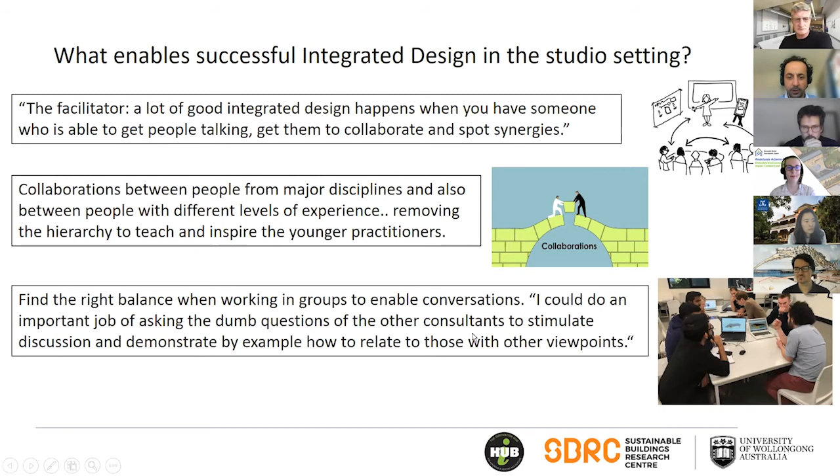You've got to find a balance when working in groups to enable conversations. One consultant says they can just ask dumb questions to stimulate discussion and demonstrate by example how to relate to other viewpoints. You've got to put all of that into a well-structured framework to enable engagement and participation.

Some additional findings: the importance of the brief and the client. Engagement of the client was a bit more difficult than in a typical consultancy project. Students were not really that brave to come up and chat with the clients, at least for the previous IDSs, but it has become a bit better after we saw that appearing last semester.

Another thing is that the client often has a lot of expectations, and you've got to manage those. For one of the sites we were looking at, we were given a list of functionality requirements for the building that were impossible to satisfy - too many spaces for the land size available.

Now we ask for ranking of ideas in the class and develop a matrix. We give the students a set of criteria to use, and that has been very helpful to them - they find this process very useful.

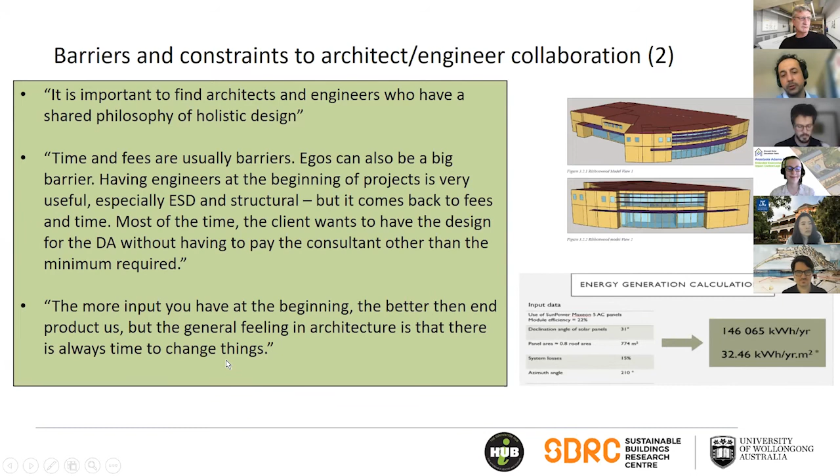Having engineers at the beginning of projects is very useful, but it comes back to fees and time. Most of the time, clients want the design for the DA ready without paying the consultant more than the minimum. The more input you have at the beginning, the architect says, the better the end product is. But the general feeling in architecture is that there is always time to change things, which is really not true in most cases.

Some other remarks: the architecture students were a bit more comfortable providing ideas than the engineering students. Attending in person was more important, easier to communicate and enable discussions - Zoom really made things a bit more challenging, as many people mentioned over the last couple of days.

Another interesting view is that we all understand the concept of green and environmental design these days, but there is a limited understanding around the impact and the quantification of design solutions at the early design stage.

And finally, I'll close with this slide. The first two points were covered by my colleagues yesterday. When you have retrofits, it's much more difficult to generate ideas than when you work with a plain site.

And the final point is, especially when you work with plain sites, we found that talking about energy efficiency or renewable energy right at the start of the design is almost non-existent unless you force it. So we took some lessons from last semester, and this semester we made changes, really forcing those concepts to come right at the start of the design. We are not allowing the design to proceed unless students demonstrate that specific renewable energy targets have been met, and we give them limitations on roof size for renewable energy generation, so they think about the envelope and passive design aspects in tandem, optimizing both together.

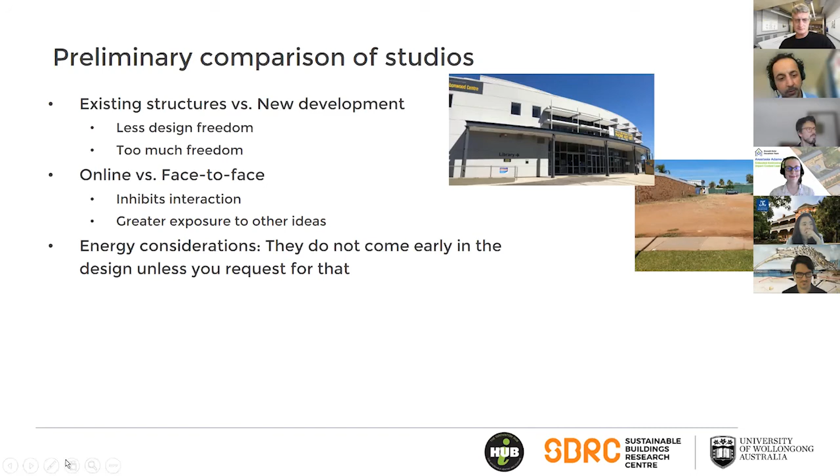And that's me, Wendy. You can take over here. It'll actually be Naima who will make a few points. Thanks, Naima. So thank you so much, Wendy.

I'm quickly going to share the deck of slides with you all here. So the process of ideas for the design of the aged care mixed-use buildings at QUT is currently under progress, and we've been collecting data each week from all the different stakeholders, analyzing the opportunities, the challenges, and the main ideas that students are exploring.

So we have the engineering and construction management students working on individual projects for their final year of the bachelor's degree. Based on the two different sites, the electrical engineering student James is focusing on microgrid, supercapacitor and batteries, whereas Ziasab, the construction management student, is looking at vertical greening systems. Within the Cairns site, which is in the tropical climatic region, electrical engineering student Jacob is looking at PV, hydrogen and microgrid aspects, and mechanical engineering student Curtis is looking at solar cooling.

And Zach Gales, a construction management student, is looking at embodied energy of materials related to durability and costs, and Hinja Wickedon, from construction management, is looking at material performance into the future. Each of these students works in conjunction with the architectural students, who are in their final semester of their one-year Master of Architecture degree. For each of the two sites, the engineering and construction management students are integrating these systems into the architecture students' designs for the aged care buildings with a mixed-use focus, and the architecture students then integrate these components into their work.

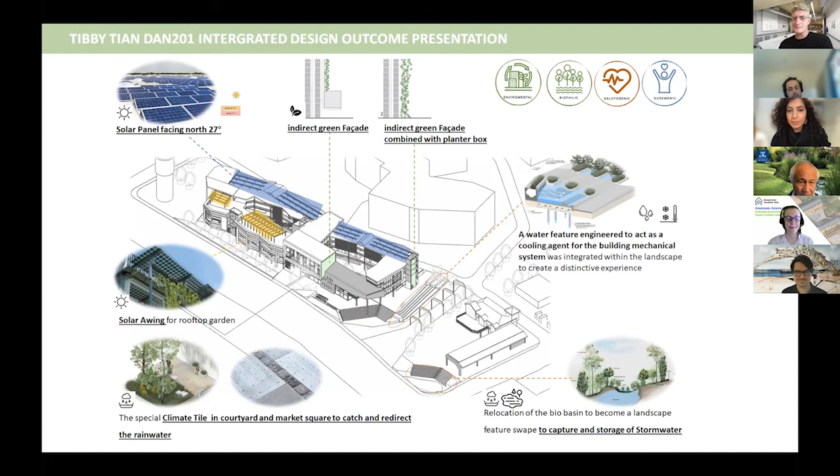I think some of the preliminary findings we've had are mutually shared with what Brendan and Georgios just presented. Going forward, some key recommendations for improving the IDS process include focusing on building services and systems on a weekly basis. It would be better, as some of our architecture students shared, if they could have more contact time with the co-designers, including consultants, engineering, and construction management students.

Another constraint we found through our IDS process was the ratio of architectural students to non-architectural co-designers needs to be balanced more. We had about 6 engineering and construction management students and about 30 architectural students. That ratio needs to be balanced in the future, so there could be at least 1 engineering student working with 2 architecture students, to balance the outcomes and the facilitation and support students need when looking at problems and solving them. So that's all from us.

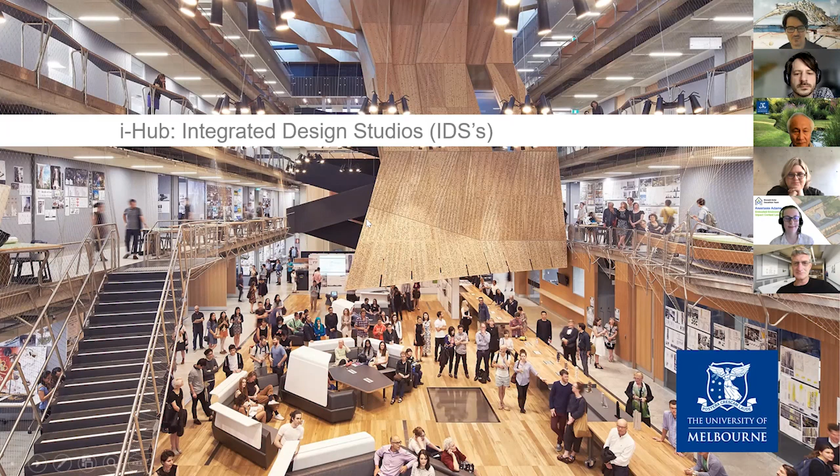In one way or another, I'm absolutely certain we will continue the Integrated Design Studios. Funding will remain an issue, but with a bit of creativity, we will get there, and get to the right point in terms of where we want to be.

I'd like to thank everyone who was part of this over the last 3 days, and also thank our audience for sending us interesting questions and being part of the conversation. It was great - we had 150 registrations across the 3 days, which is great.

Last up, a slide taken recently from a symposium we took part in with CSIRO, where we discussed integrated design and they picked up on some of the comments we made. As a final comment for everyone: adapt or perish, I think, is a key message. I don't think we need to tell this to anyone here in this room, but out there in the industry, things are changing, and they're changing for the better. That would be my closing comment.

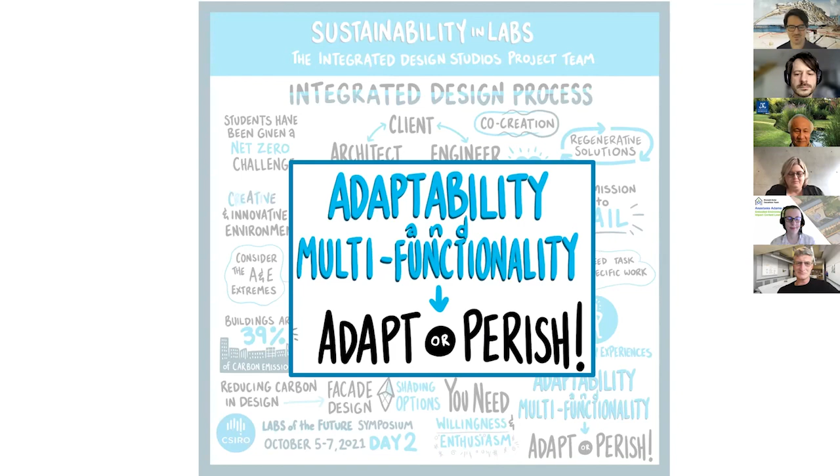Handing over to you, Marie.